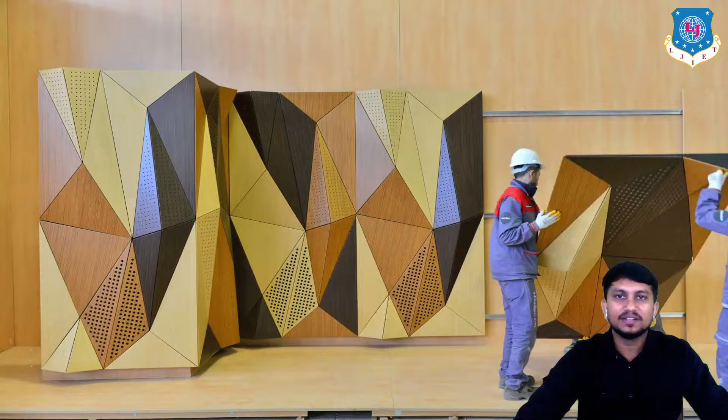So let's begin. The word acoustic is originally derived from a Greek word meaning to hear. Hence, acoustics is defined as the science of sound, and as such it discusses the origin, propagation, and auditory sensation of sound.

A sound is produced when part of the atmosphere is compressed suddenly, but due to elasticity of air, the particles originally disturbed in turn disturb the neighboring particles. Ultimately, the compression is propagated or spread away from the source of the sound. The sound thus travels in the form of waves, and when these waves come near our eardrums, we feel a sensation of hearing. That's how we feel the sensation of hearing.

Now let's see what are the requirements of good acoustic material in construction of sound insulated structure. First requirement, material should be durable and should not be liable to be attacked by insects, termites, etc. It should be easily available at reasonable cost.

It should be efficient over a wide range of frequencies. The material should be fire resistant also. It should be non-hygroscopic and heat insulating. Here, hygroscopic means the tending to receive moisture.

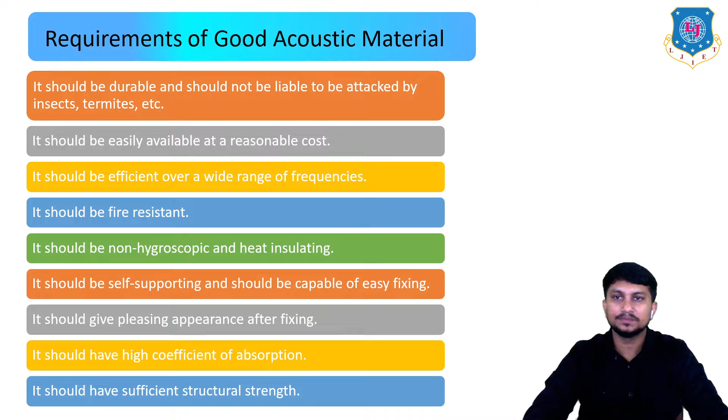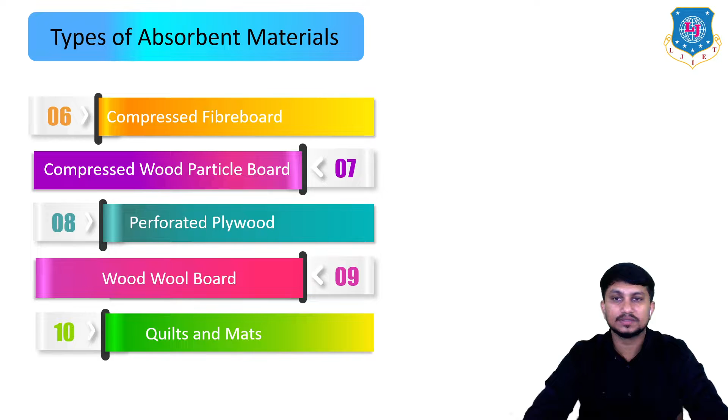Now let's see what are the various types of absorbent materials used in this acoustical construction. First is hair felt, second is acoustic plaster, third is acoustical tiles, fourth is strawboard, fifth is pulpboard, next is compressed fiberboard, then compressed wood particle board, perforated plywood, wood wool board, and quilts and mats. So these are a total of 10 types of absorbent materials. Let's discuss these all types of materials one by one.

Starting with hair felt. This material was used by Professor Sabin in his experimental works. This is how hair felt looks like. The average value of coefficient of absorption of 25 mm thick hair felt is around 0.6. So this type of material can be used as the sound insulation material.

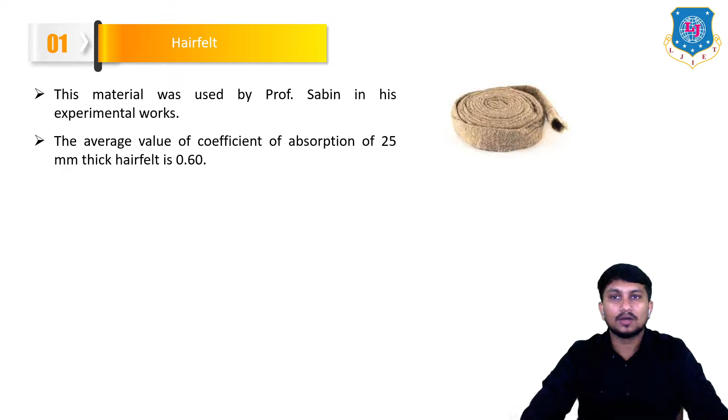Second type of material is acoustic plaster. This is also known as fibrous plaster and it includes granulated insulation material mixed with cement. This is how acoustic plaster looks like. If quantity of cement is more than required, the plaster will not have sufficient pores to become effective for acoustics. If quantity of cement is less, the plaster will not have enough strength. So we have to decide the quantity of cement carefully while manufacturing this acoustical plaster.

For thickness of 20 mm and density of 1 kilonewton per meter cube, the acoustic plaster possesses an absorbent coefficient of 0.3 at 500 cycles per second. Acoustic plaster boards are also available in the market. They can be fixed on the wall and their coefficient of absorption varies from 0.15 to 0.30.

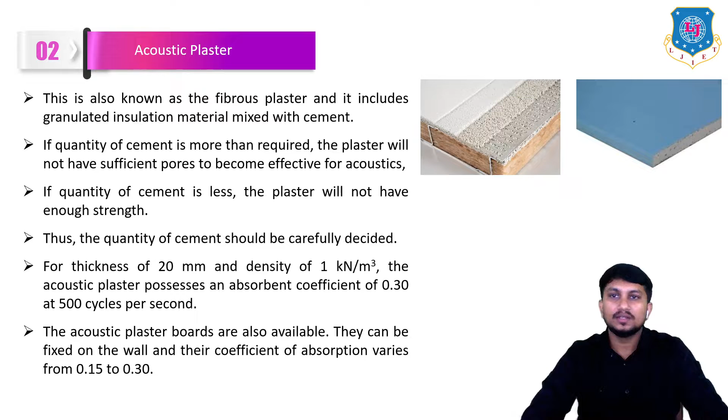The next type of absorbent material is acoustic tiles. This is how acoustic tiles looks like. These are made in factory and sold under different trade names. The absorption of sound is uniform from tile to tile and they can be fixed easily. However, acoustical tiles are relatively costly compared to other absorbent materials. They are more suitable for rooms in which small area is available for acoustical treatment.

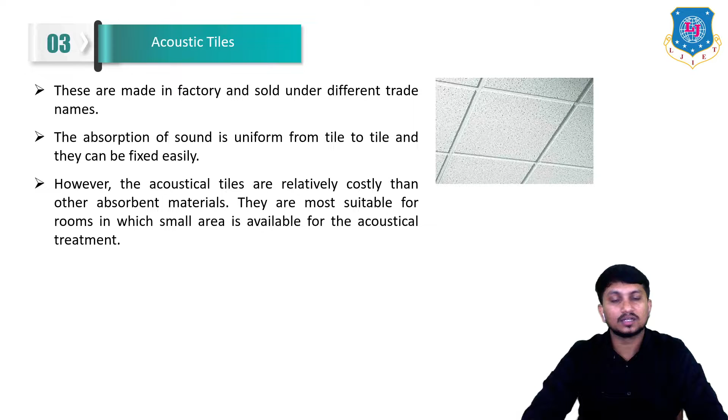The next type of absorbent material is strawboard. This is how strawboard looks like. This material can also be used as absorbent material with a thickness of 13 and density of 2.4 kN per meter cube. It possesses a coefficient of absorption of about 0.3 at 500 cycles per second.

Next is pulpboard. This is how pulpboard looks like. These are soft boards which are prepared from compressed pulp. They are comparatively cheap and can be fixed by ordinary paneling. The average value of coefficient of absorption is around 0.17, so this is a very cheap material you can use in sound insulation.

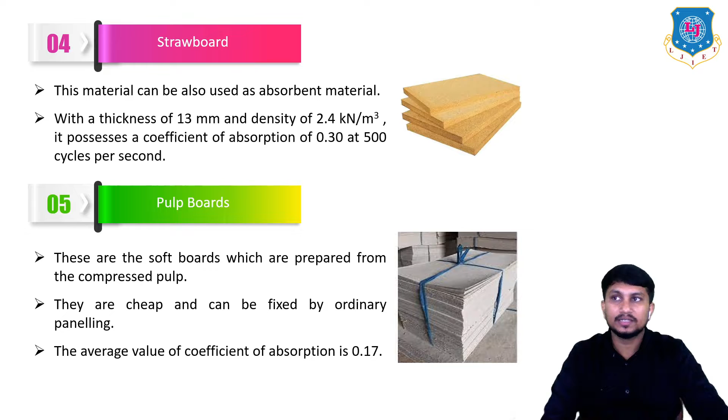Next is compressed fiberboard. This material may be perforated or unperforated. The average coefficient of absorption for the unperforated or normal compressed fiberboard is 0.3, and for the perforated type it is 0.52.

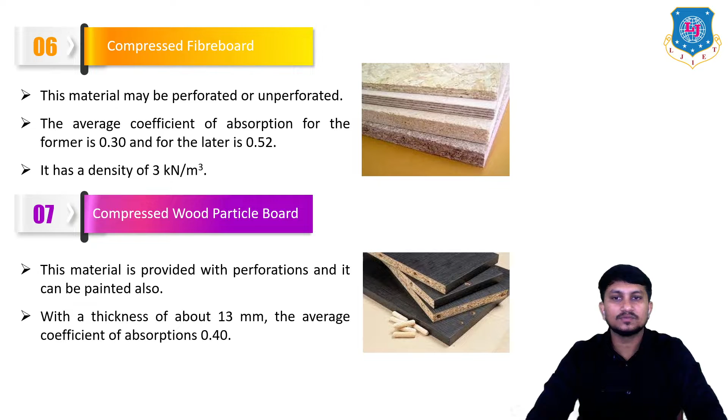The next is compressed wood particle board. This is how it looks like. This material is provided with perforation and it can be painted also, like in this figure. With a thickness of about 13 mm, the average coefficient of absorption of this compressed wood particle board is around 0.4.

Next is perforated plywood. This material can be used by forming composite panels with mineral wool and cement asbestos, or with mineral wool and hardboard. It is generally suspended from the trusses. The average value of coefficient of absorption for the former composite panel is as high as 0.95, and for the latter composite panel it is about 0.20. So this is called perforated plywood sheets.

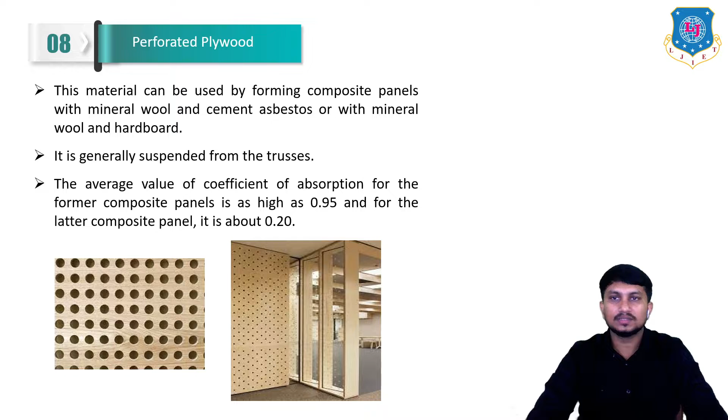So these are the various materials which can be used in the absorption of sound, or you can say in sound insulation.

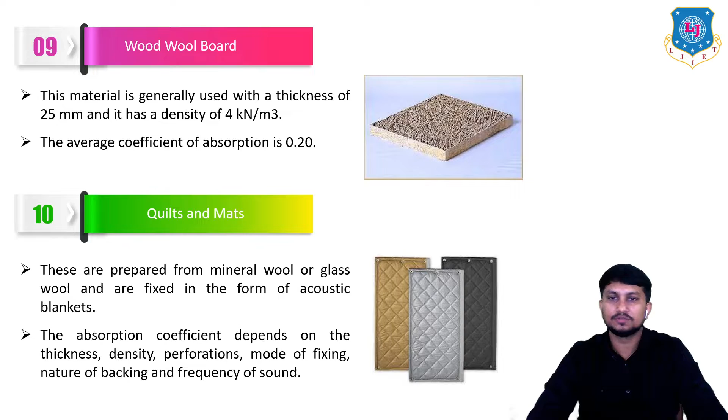Now let's see what are the various conditions for good acoustics of an auditorium or a hall. The initial sound should be of adequate intensity or loudness. This is quite obvious as it is impossible for a speaker to be heard over a long distance without the help of a sound amplification system, right?

The sound which is produced should be evenly spread over the whole area covered by the audience. If this condition is not satisfied, conditions tending toward the formation of echoes will be established.

The initial sound should be clear and distinct so that there is no possibility of disordered speech in the auditorium or hall. For a hall to be used for music, the initial sound should reach the audience with the same frequency and intensity. All undesirable sound should be reduced to such an extent that it will not interfere with normal hearing of music or speech.

The undesired sound may be originating either from inside or outside the room. So these are the various conditions for good acoustics of an auditorium or hall.

Now let's see what are the factors considered in acoustic design of an auditorium. There are various factors which affect the acoustic design of an auditorium, like volume, shape, sound absorption, site selection, seats and seating arrangements. Let's discuss these factors one by one.

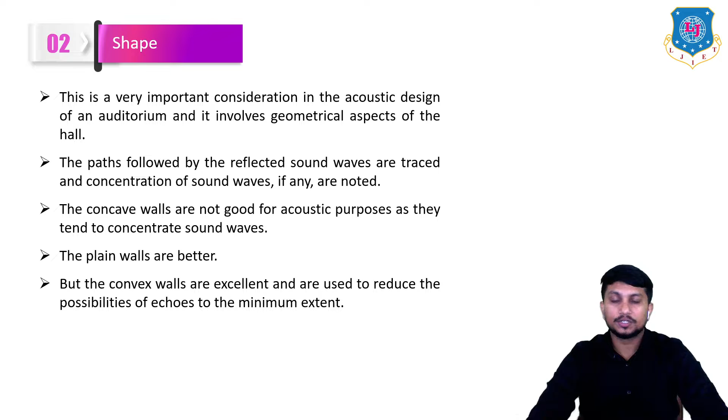For talking pictures, synchronization of sound with lip movement is the most essential thing in auditoriums, theaters, etc. For theaters, a person with normal vision should be able to discern facial expressions of the actors on the stage. To satisfy these conditions, the distance of the farthest seat from the curtain line should generally not exceed 23 meters. So this criteria should be considered in design of an auditorium or hall.

And fan-shaped floor plan is the best type of plan you can use in the design of the auditorium.

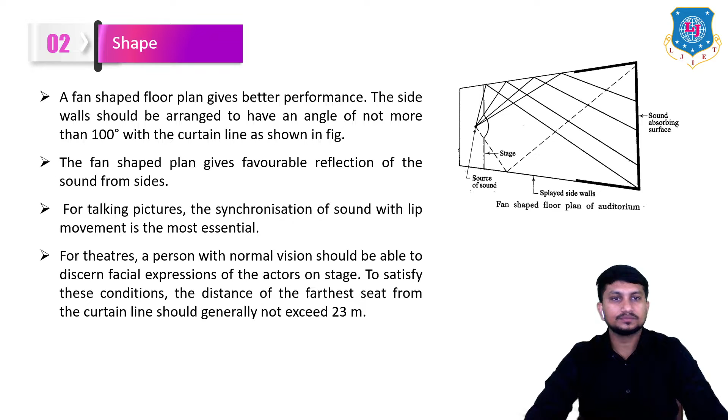The next factor is sound absorption. Adequate absorbing surfaces should be provided in the hall to control reverberation. This is one type of sound effect produced in the auditorium. The acoustic design of an auditorium will be incomplete without the provision of such a surface.

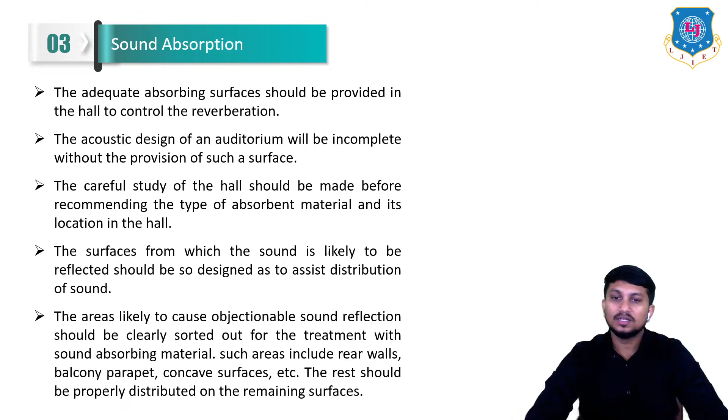A careful study of the hall should be made before recommending the type of absorbent material and its location. The surfaces from which sound is likely to be reflected should be designed to assist distribution of sound. Areas likely to cause objectionable sound reflection should be sorted out for treatment with sound absorbing material, such as rear walls, balcony parapet, and concave surfaces. The rest should be properly distributed on the remaining surfaces. So that's all about the sound absorption factor.

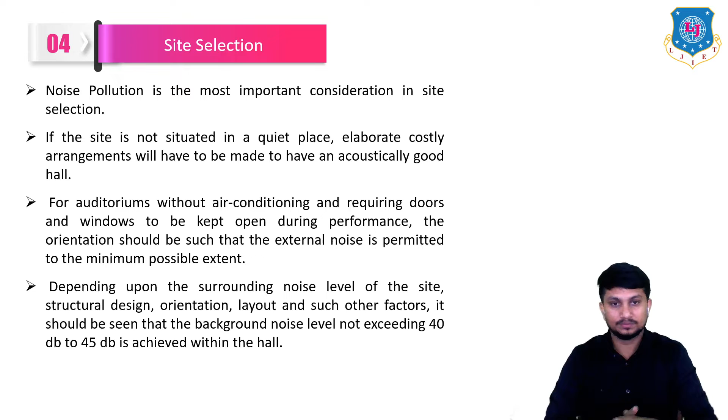Next is site selection. Noise pollution is the most important consideration in site selection. If the site is not situated in a quiet place, elaborate, costly arrangements will have to be made to have an acoustically good hall. For auditoriums without air conditioning, requiring doors and windows to be kept open during performance, the orientation should be such that external noise is permitted to the minimum possible extent. Depending upon the surrounding noise level of the site, structure design, orientation, layout, and other factors, the background noise level within the hall should not exceed 40 to 45 decibels. So the site of the auditorium should be as quiet as possible.

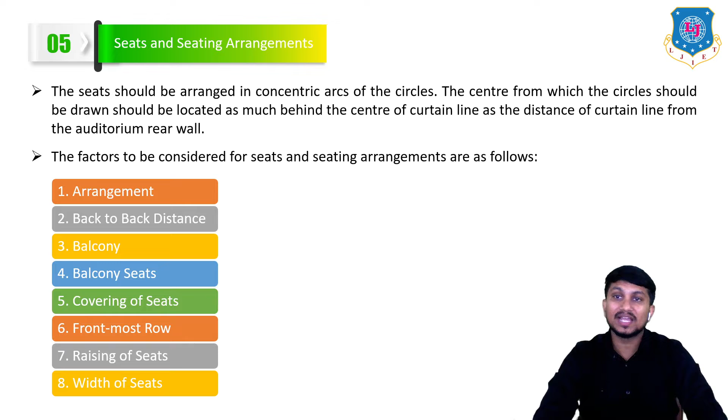The factors which affect seat and seating arrangements are: arrangement, back-to-back distance, balcony seats, covering of seats, frontmost row, raising of seats, width of seats, etc. These are the various factors which affect the seats and seating arrangements of an auditorium.

Let's see all these factors one by one, starting with the arrangement of seats. The seats should be staggered sideways in relation to those in front, so that a listener in any row is not looking directly over the head of the person in front of him. This is how you can arrange the seats in the auditorium.

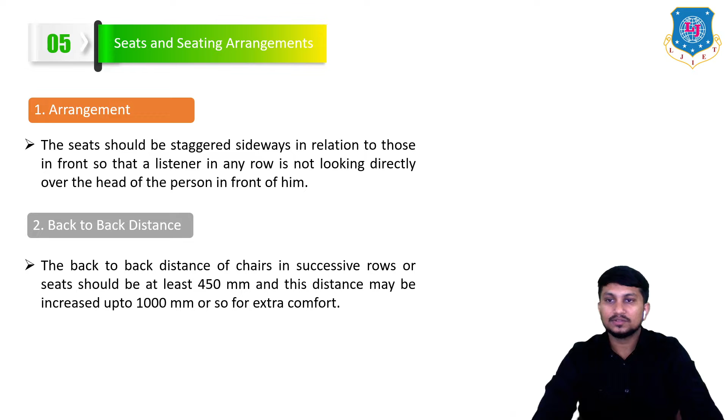Second is back-to-back distance. The back-to-back distance of chairs in successive rows or seats should be at least 450 mm, and this distance may be increased up to 1000 mm or so for extra comfort. So the minimum back-to-back distance should be around 450 mm.

Third is balcony. Where a balcony is provided, precautions must be taken. The length L1, as shown in this figure, is the length of the balcony, and should not be greater than 2 times H1. H1, also shown in this figure, is the height of the balcony from the ground floor. So L1 should not be greater than 2 times H1.

L1 should not be greater than L by 3. H2 should not be less than 3 meters, and H3 should not be less than 2.3 meters. Here L is the length of the auditorium. L1 is the projection of the balcony, or the cantilever portion of the balcony from the column or slab. H1 is the height of the balcony edge at the end, and H2 is the height of the balcony edge at entry. H3 is the height of the last row in the balcony from the projection room. These are the various factors to consider while deciding balcony sizes in an auditorium.

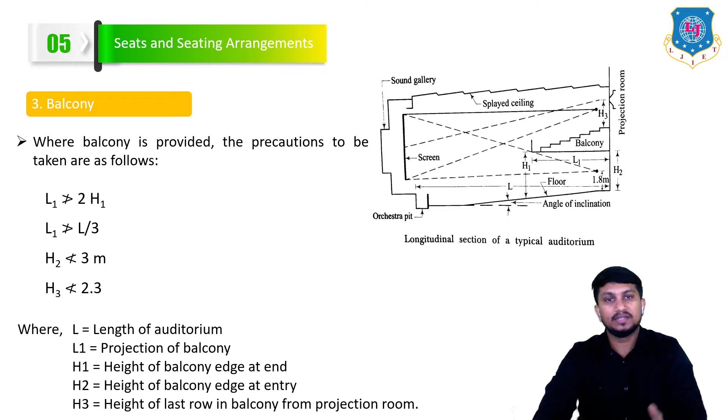This figure shows the longitudinal section of a typical auditorium. If the balconies are deep, there are chances for sound shadows to develop. This is due to the fact that seats underneath the balcony do not receive ceiling reflections. This defect can be rectified by providing an angle reflector, as shown in this figure. This angle reflector reflects the sound and reduces the sound shadow problem.

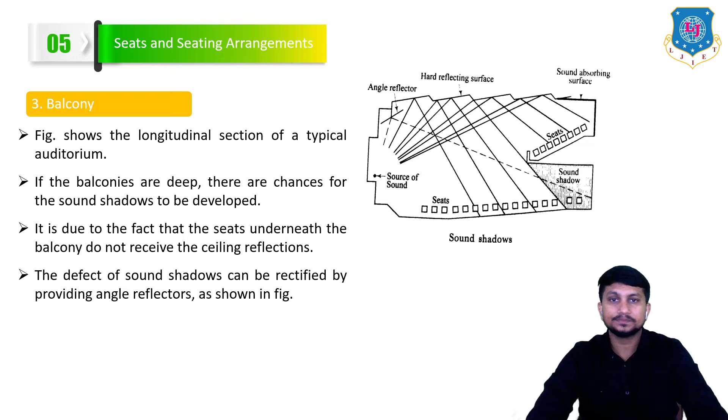The next factor is balcony seats. The elevation of balcony seats should be such that the line of sight is not inclined more than 30 degrees to the horizontal. Next is covering of seats. If covered or upholstered seats are provided, the acoustic characteristics of the hall are not appreciably altered by fluctuating audience occupancy.

Next is the frontmost row. The angle subtended with the horizontal at the frontmost observer by the highest object to be seen on the stage should not exceed 30 degrees. On this basis, the distance of the first row works out to about 4.5 meters for cinemas and 3.6 meters for theaters. You can consider these figures while deciding the frontmost rows.

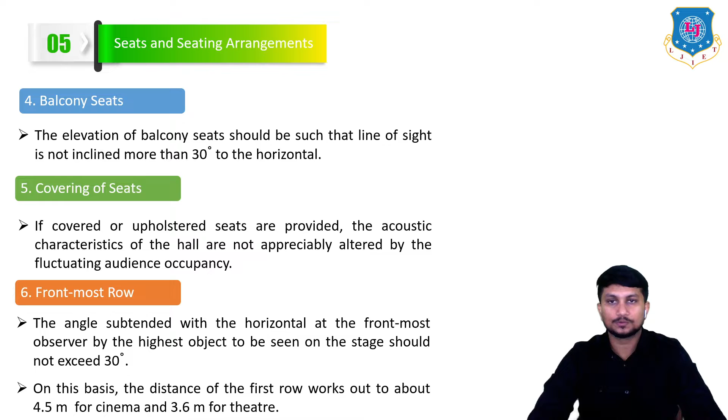Next is raising of seats. The successive rows of seats should be raised over the preceding ones for good visibility and good listening conditions. The rise in level may be between 80 mm to 120 mm per row. As a thumb rule, the angle of elevation of the inclined floor of the auditorium should not be less than 8 degrees, it should be more than that.

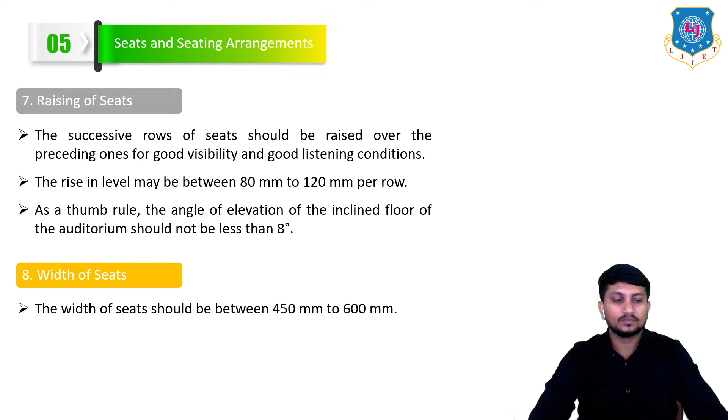The last factor is the width of seats. The width of seats should be between 450 mm to 600 mm from a comfort point of view. So that's all about the factors considered in the acoustic design of an auditorium.

Now let's see what are the objects involved in the design of an auditorium. There should be a good direct path for the sound. This will enable the sound to be heard loudly and clearly and will avoid confusion with subsequent reflections. It should be seen that none of the subsequent reflections has the same strength as the original sound. The third object is that the desired degree of reverberation should be provided in the auditorium. So to achieve these three objects, we have to design an auditorium.

Now let's see what are the various defects in an auditorium and the various remedies to reduce these types of defects. First is reverberation, then formation of echoes, sound foci, dead spots, loudness, and exterior noise.

Let's discuss first reverberation. The defect of excessive reverberation is very common in many auditoriums. The effect is that the sound once created prolongs for a longer duration, resulting in confusion with the sound created next. This is called the reverberation effect.

The remedy to reduce this type of effect is to correct the time of reverberation by suitably installing absorbent materials. If you install various absorbent materials surrounding the hall, you can reduce this reverberation problem. That's all about the first defect, reverberation.

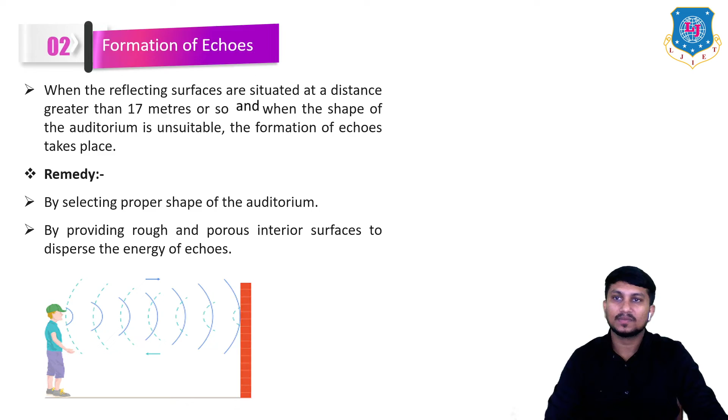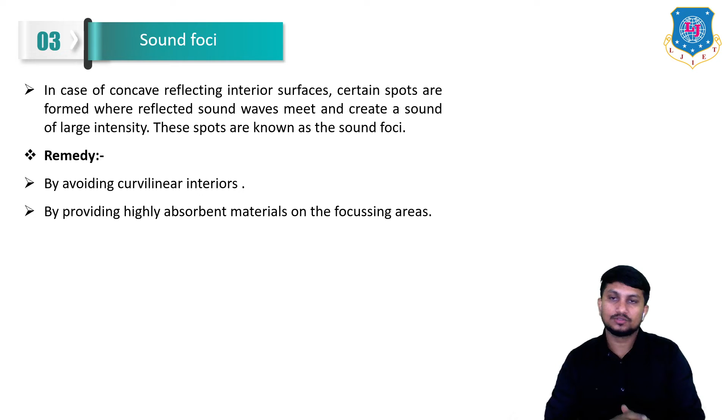The remedy to reduce this sound foci defect is done by avoiding curvilinear interiors. You have to provide convex type interior surfaces compared to concave type reflecting surfaces. The second remedy is by providing highly absorbent materials on the focusing areas where this type of problem can be generated. So these are the two remedies to reduce this sound foci defect.

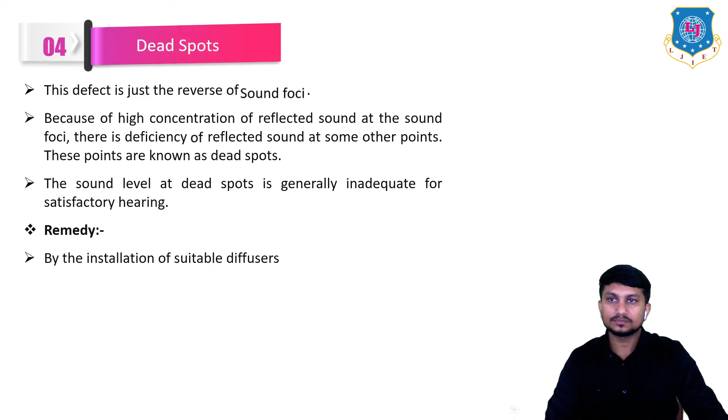The next defect is loudness. This defect is due to lack of reflecting surfaces near the source of sound and excessive absorption of sound in the hall. The remedy to reduce this problem is done by arranging hard reflecting surfaces near the source of sound and adjusting the absorption of the hall so as to give an optimum time of reverberation.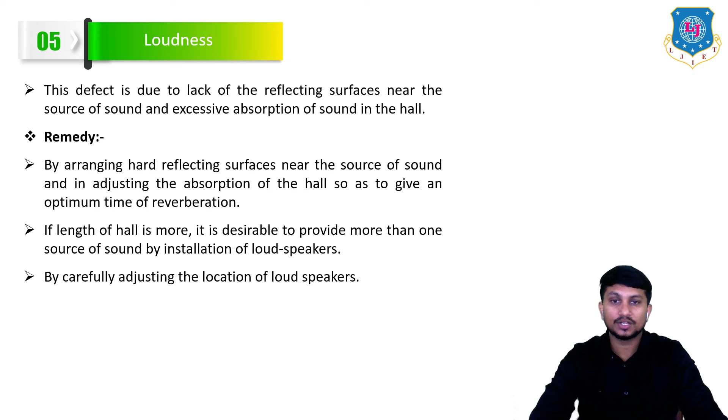If the length of the hall is more, it is desirable to provide more than one source of sound by installation of loudspeakers, or by carefully adjusting the location of the loudspeaker, you can reduce this type of defect.

The last defect in an auditorium is exterior noise. This defect is due to poor sound insulation, and hence the exterior noise enters the auditorium either through loose doors and windows or through walls and other structural elements having improper sound insulation. The exterior noise is developed by vehicles, factories, cooling plants, etc.

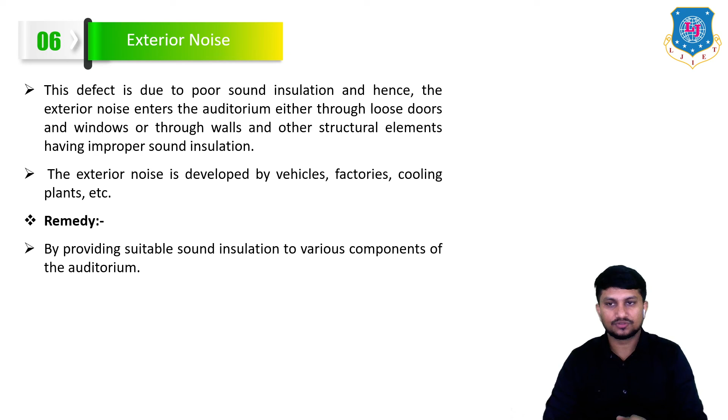The remedy to reduce this exterior noise is done by providing suitable sound insulation to various components of the auditorium. If you provide proper sound insulation in the walls, doors and windows, this problem of exterior noise can be easily rectified.

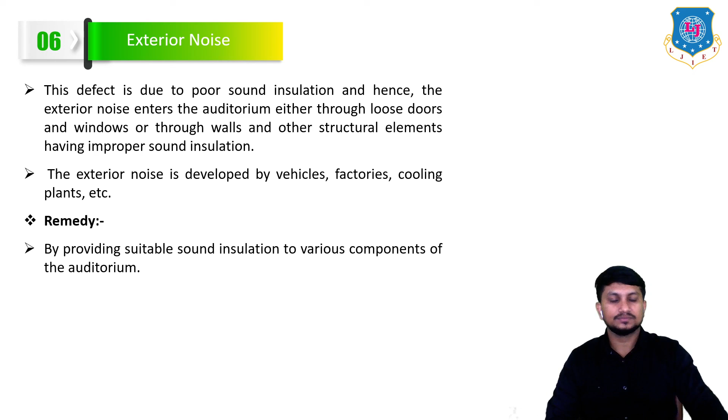So that's all about the defects in an auditorium and how you can reduce this type of defects in an auditorium. That's all about today's lecture. Thank you for watching.